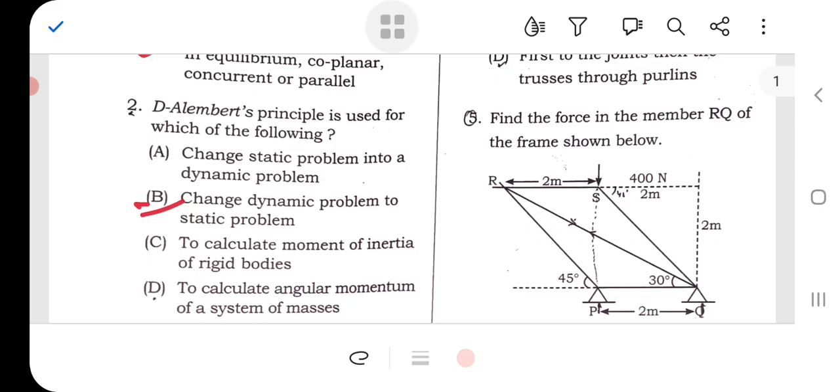Question number 2: D'Alembert's principle is used for which of the following? To change a dynamic problem into a static problem, using a free body diagram.

What is a free body diagram? It is a sketch of an isolated body that shows external forces on the body and reaction forces. Option C.

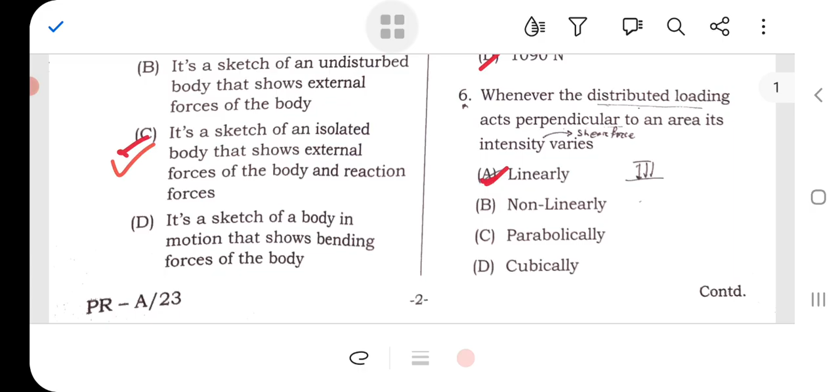Whenever distributed loading acts perpendicular to an area, its intensity varies linearly - this is called shear force. Then, calculation of moment of body due to loading involves a quantity called moment of inertia.

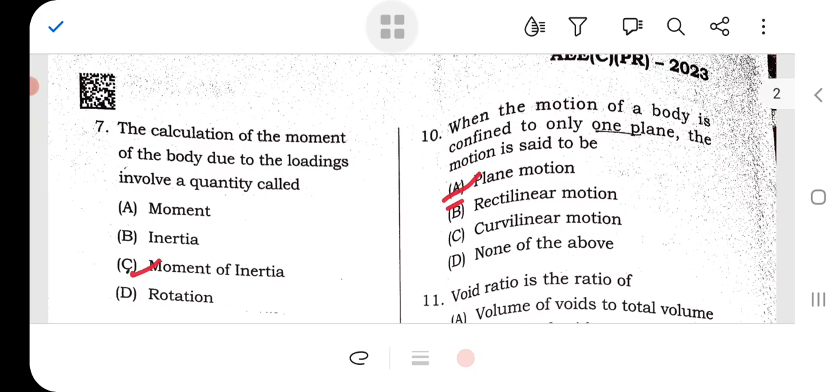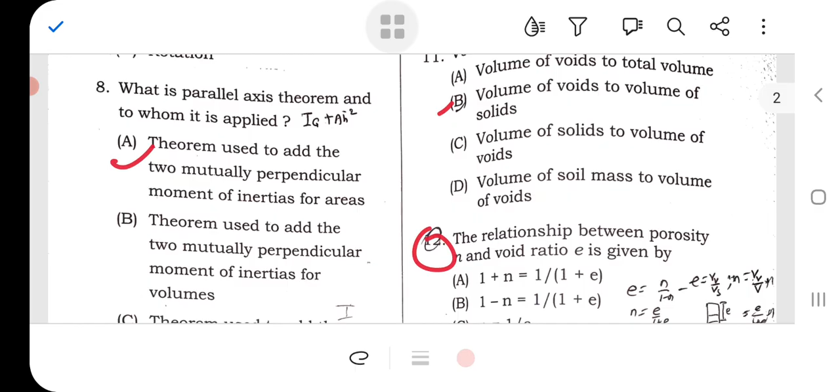What is the parallel axis theorem and where is it applied? This theorem is used to add the two mutually perpendicular moments of inertia for areas.

Option A: change in momentum of an object is equal to impulse. When the motion of the body is confined to only one plane, the motion is said to be plane motion. Void ratio is the ratio of volume of voids to volume of solids.

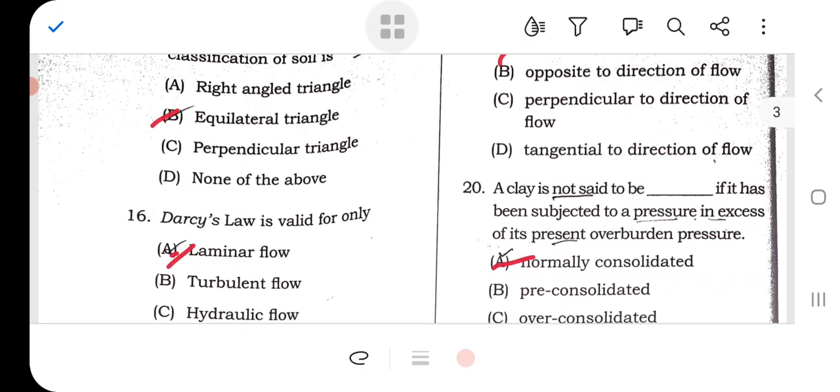The study of seepage of water through the soil is important for which of the following? Seepage study is important for purposes like drainage of soil, stability of slope, and ground water flow towards wells - for all these reasons we study seepage.

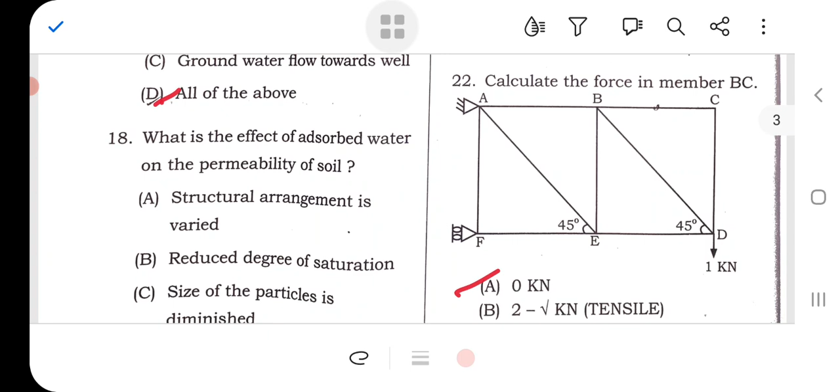What is the effect of adsorbed water on permeability? It reduces the pore size. Option D.

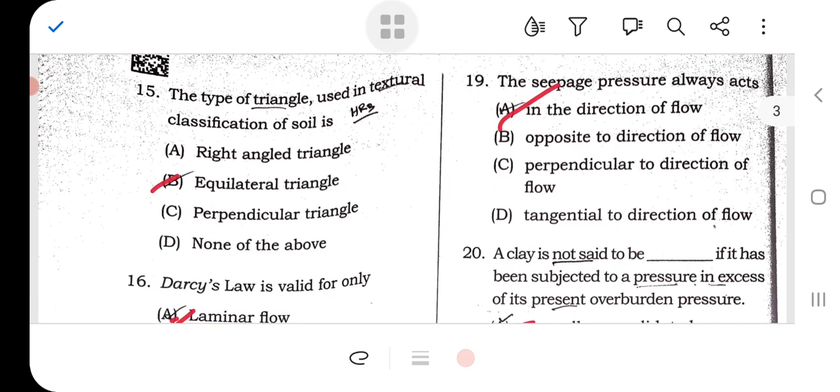The seepage pressure always acts in the direction of flow. A clay is not said to be [blank] if it has been subjected to pressure in excess of its present overburden pressure.

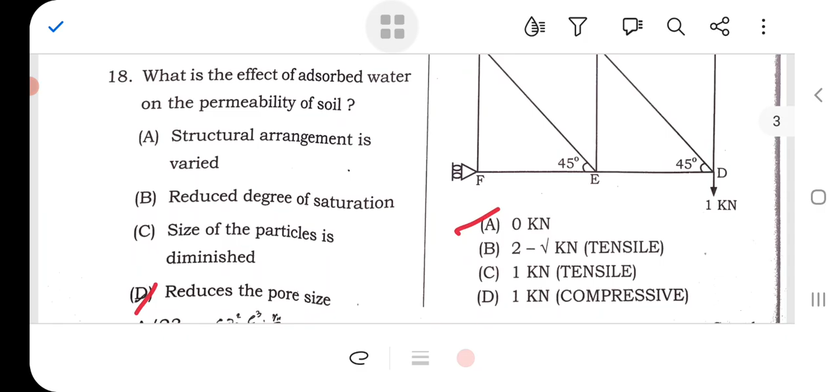Why is the base plate provided in short roof trusses? As provision for temperature related expansion and contraction.

Calculate the kinematic indeterminacy of the pin jointed plane frame. For a pin jointed plane frame, kinematic indeterminacy is 2j minus r.

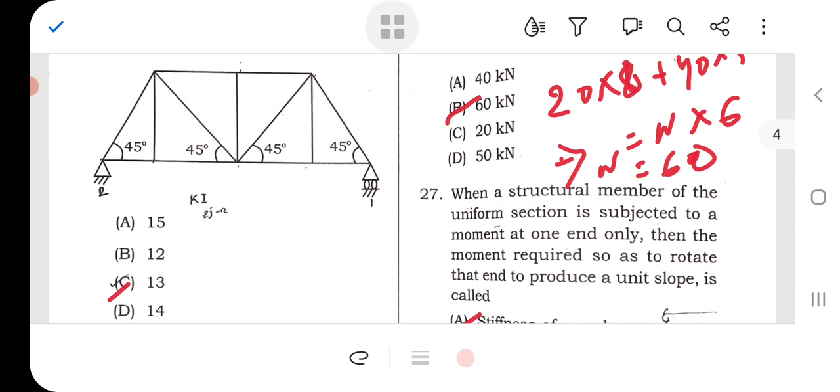Which of the following is placed false for deflection of a point near a fixed support? Displacement as well as slope is non-zero.

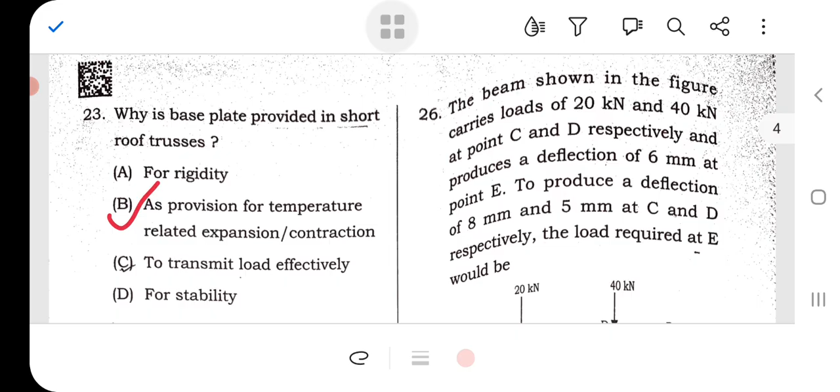The beam shown in figure carries a load of 20 kN and 40 kN at points C and D respectively, producing a deflection of 6 mm at point E, and deflections of 8 mm and 5 mm at C and D. Calculate accordingly - how much load produces how much deflection.

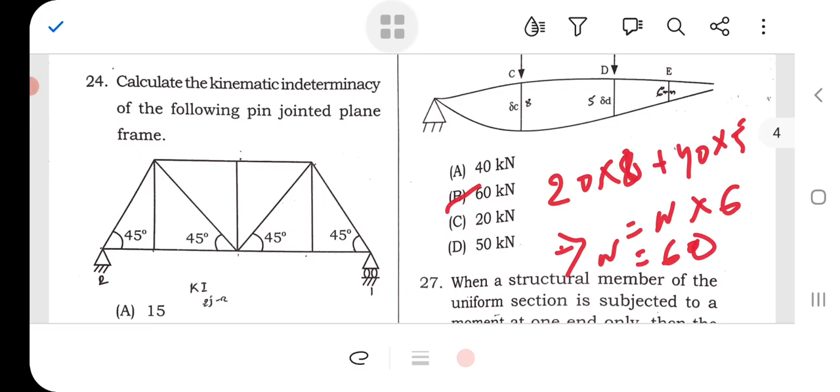When a structural member of uniform section is subjected to a moment at one end only, the moment required to rotate that end to produce a unit slope is called the stiffness of the member.

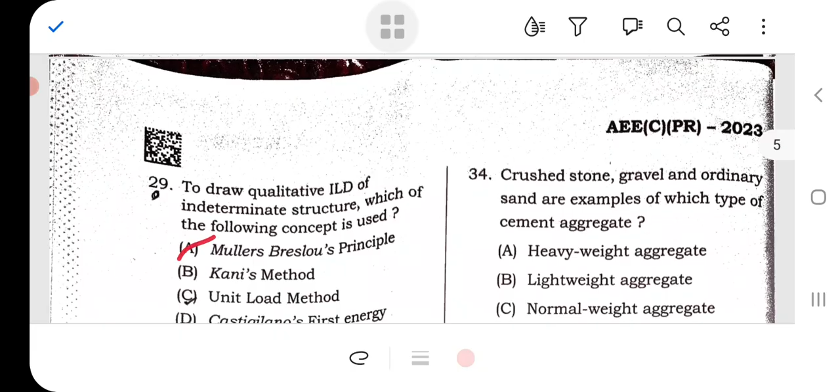To draw qualitative ILD diagram, which concept is based on the Muller-Breslau principle?

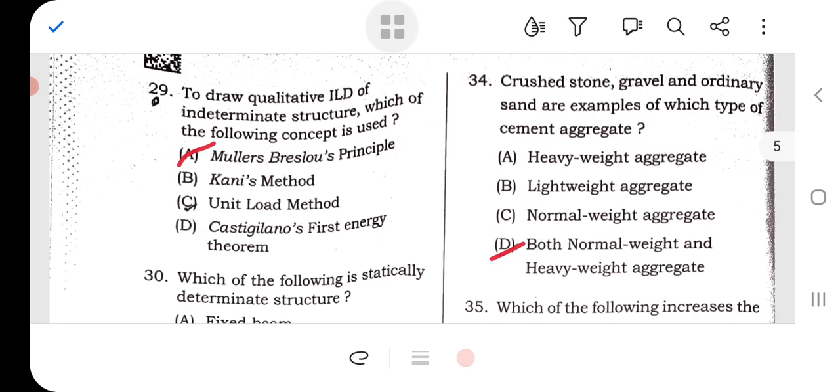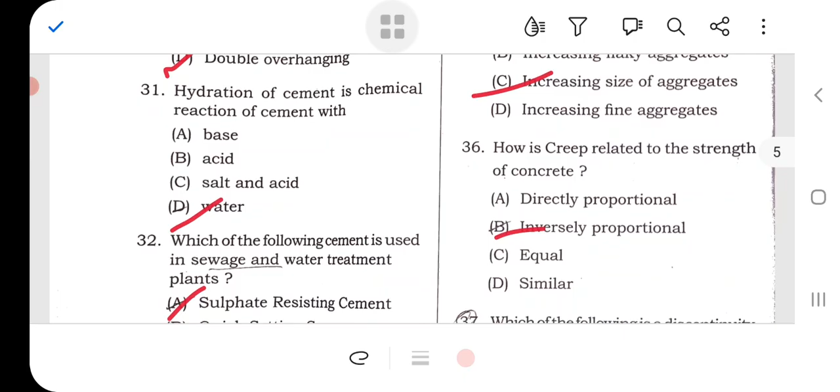Which of the following is statically determinate structure? Double overhanging beam is statically determinate structure. Hydration of cement is a chemical reaction with water.

Which of the following is used in sewage and water treatment plant? Sulfate resisting cement. How many layers of concrete are needed to fill a slump cone? 4 layers by height.

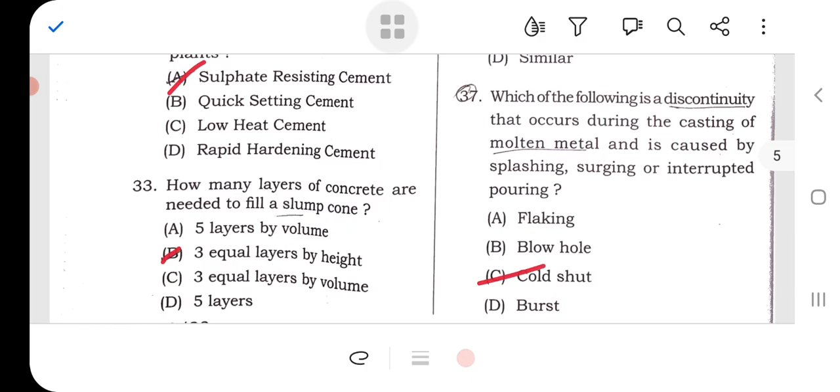Then discontinuity is which of the following? Crushed stone, gravel, ordinary stone, sand are examples of which type of rock? Both normal weight and heavy weight aggregate.

Which of the following increases the workability of concrete? Increase in size of aggregate increases the workability of concrete.

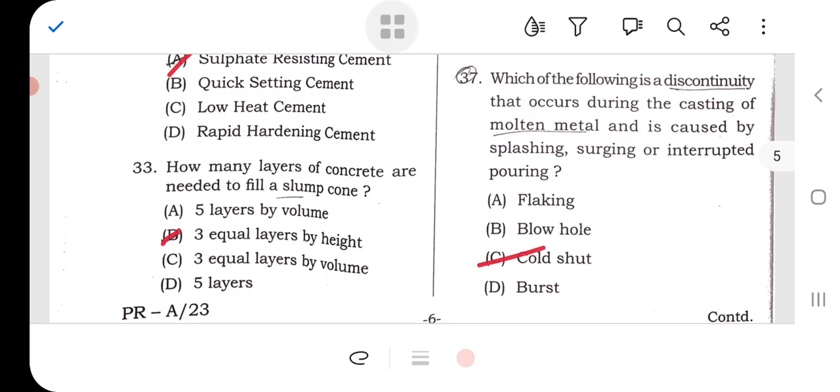How is creep related to strength of concrete? Inversely proportional, it is directly proportional to 1 by (1 plus theta). So theta represents creep, and theta with concrete strength is inversely proportional - as creep decreases, concrete strength increases.

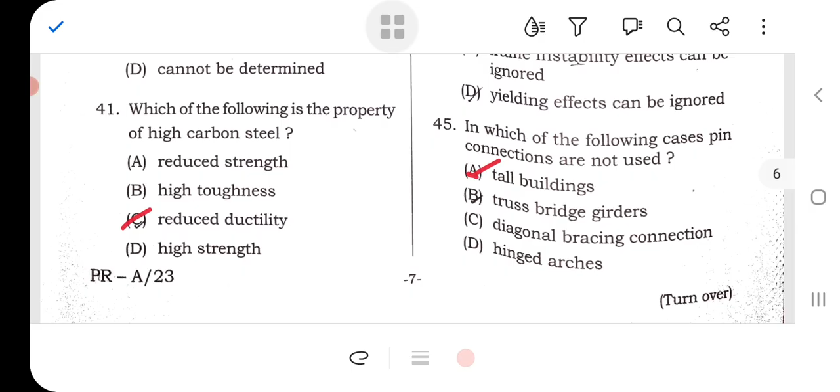Which of the following relation is correct? Design strength is equal to ultimate strength divided by partial factor of safety.

Which of the following is true about bracket connection? Option D: it has more rigidity than any other connection.

Which of the following is not an assumption of first order elastic analysis of rigid jointed frame? Member instability effect cannot be ignored.

In which of the following cases are pin connections not used? Pin connections are not used in tall buildings.

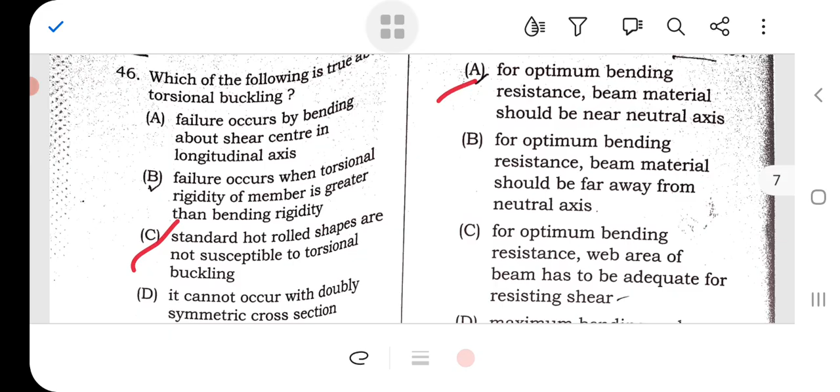Which of the following is true about torsional buckling? Standard hot rolled shapes are not susceptible to torsional buckling.

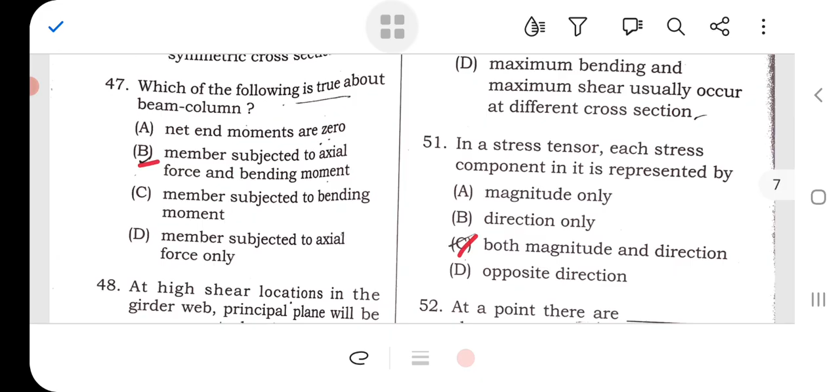Which of the following is true about beam-column? A member subjected to axial force and bending moment is true about beam column.

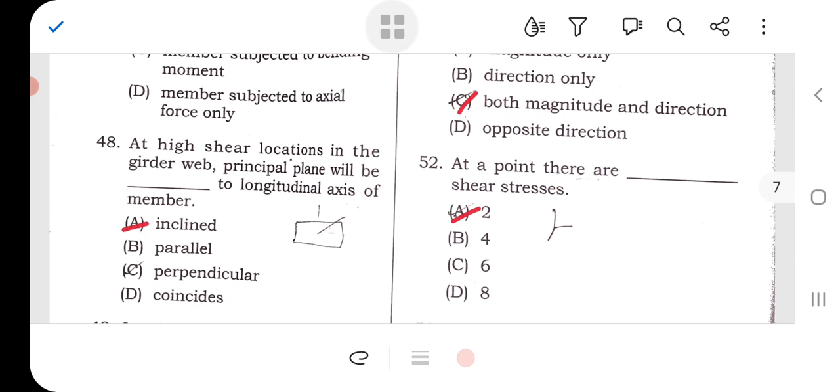At a higher shear location in the girder web, the principal plane will be inclined to the longitudinal axis or longitudinal member.

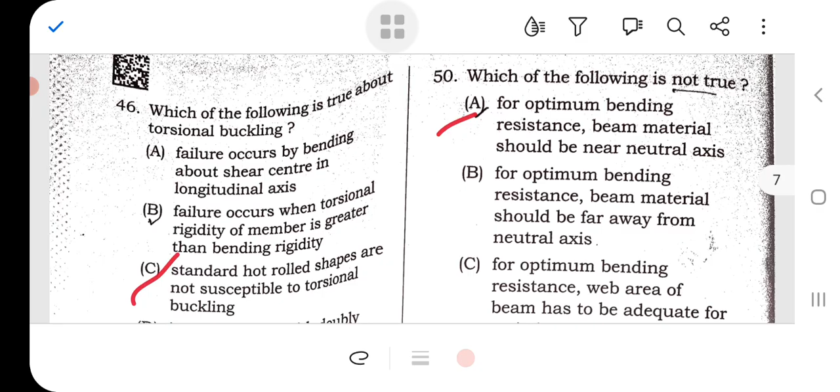Which of the following is not true? For optimum bending resistance, beam material should be nearer to the neutral axis - this statement is false.

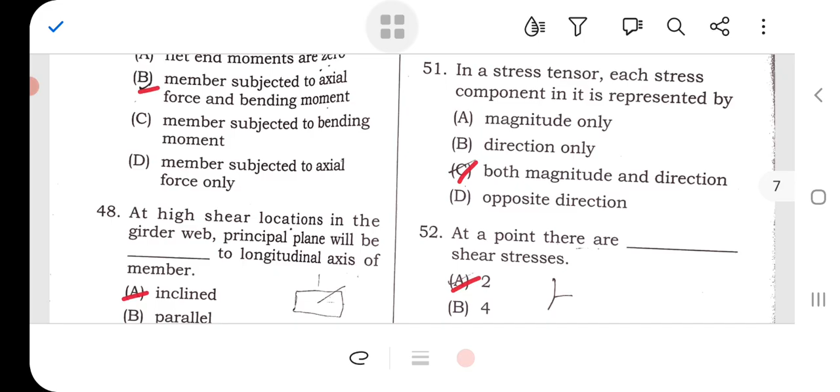In a stress tensor, each stress component is represented by both magnitude and direction. At a point, there are only two shear stresses.

Mohr's circle represents the state of stress at a point on an oblique plane.

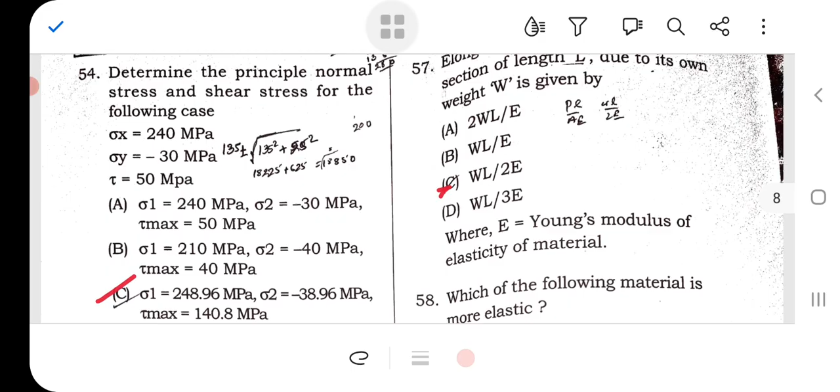Poisson's ratio is lateral strain divided by longitudinal strain.

Elongation of a bar of uniform cross section of length L due to its own weight W is WL by 2AE.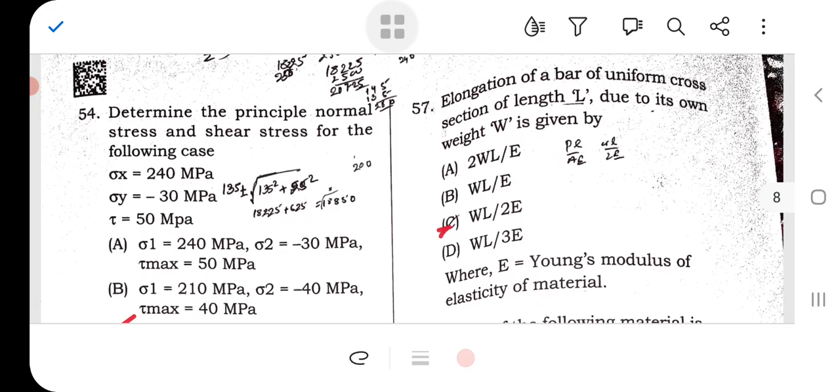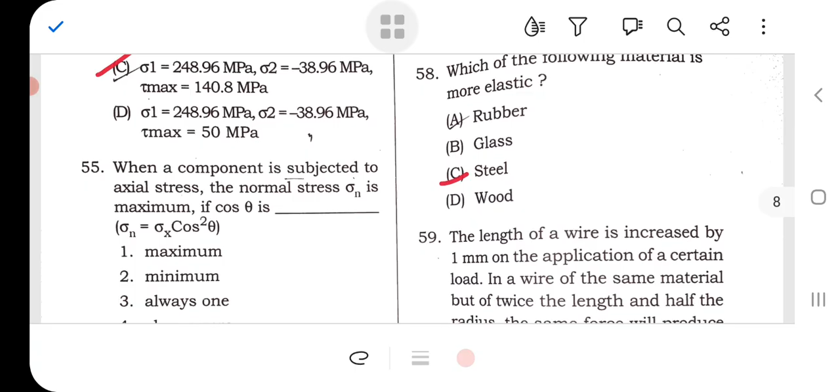Which of the following material is more elastic? Steel. Poisson's ratio of rubber is high, but considering steel's elongation behavior, we say steel is more elastic.

The length of a wire is increased by 1mm on the application of a certain load. In a wire of the same material but of twice the length and half the radius, the same force will produce an elongation of 0.5mm. We use the formula delta L equals PL by AE to work this out.

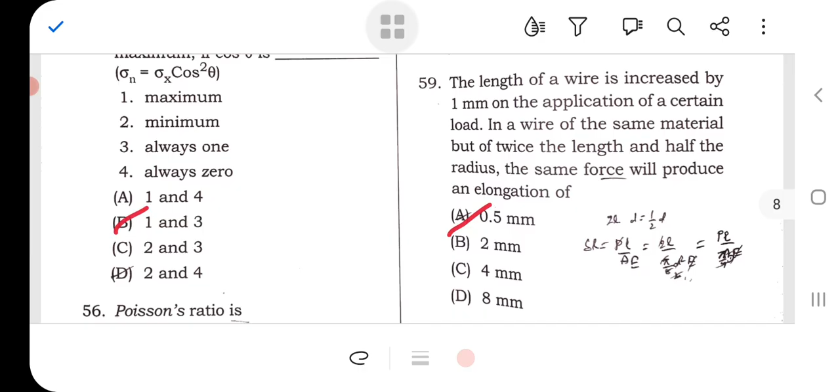When mild steel is subjected to tensile load, its fracture conforms to a cup and cone shape.

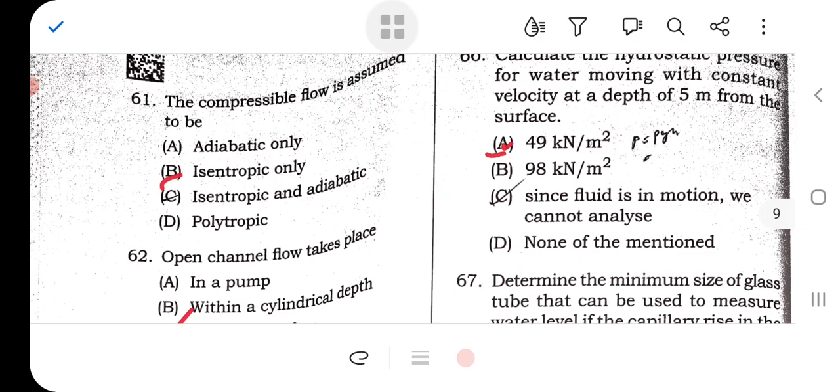The compressible flow is assumed to be isentropic only. Open channel flow takes place on a free surface. Froude number depends on flow velocity, external field, and characteristic length.

The pressure at any given point of non-moving fluid is called the hydrostatic pressure.

The hydraulic press has a ram of 30cm diameter and a plunger of 2cm diameter. It is used for lifting a weight of 35 kN. Find the force required in the plunger. This is solved using Pascal's law; using Pascal's law we calculate and get the answer as 155.5.

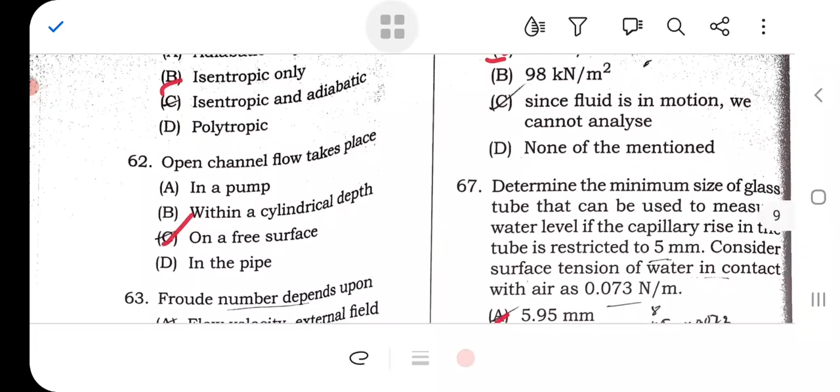Calculate the hydrostatic pressure for water moving with constant velocity at a depth of 5 meters from the surface. Answer: 49 kN per meter square, using the formula p equals rho g h.

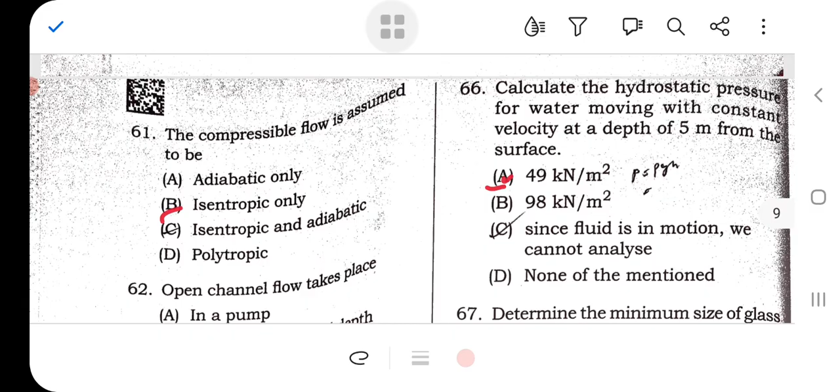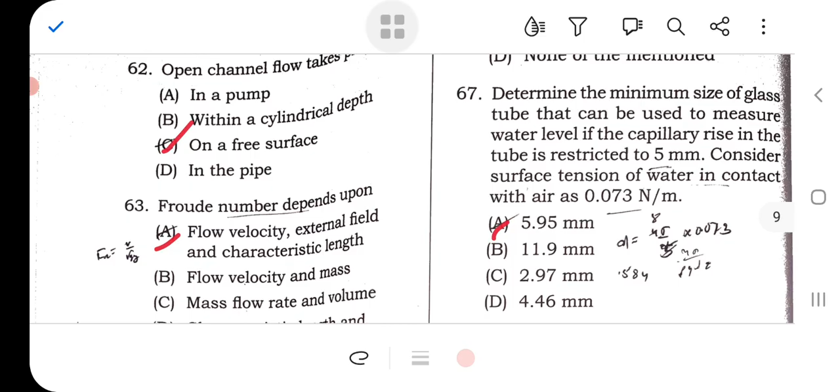Determine the minimum size of glass tube that can be used to measure water level, with capillary rise in a tube restricted to 5 mm. Consider the surface tension of water as 0.073 Newton per meter. Using the formula 4 sigma by d, the answer comes out to 5.95.

For a liquid, capillary rise will decrease or fall with rise in temperature. As temperature rises, capillary rise decreases.

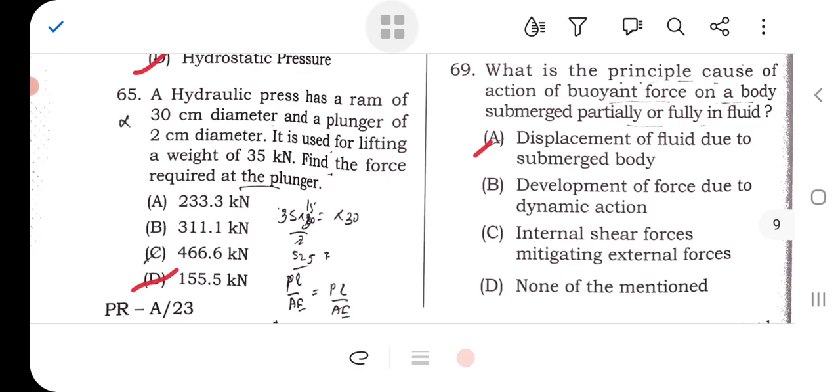What is the principal cause of buoyant force? It is the displacement of fluid due to the submerged body.

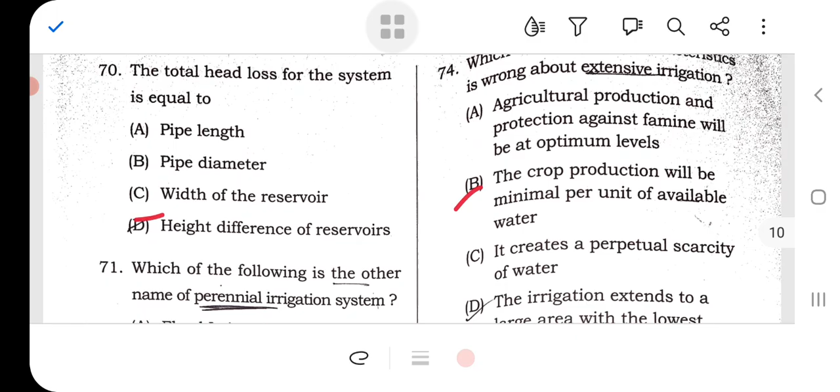Total length: the total head loss for a system is equal to the height difference of the reservoir.

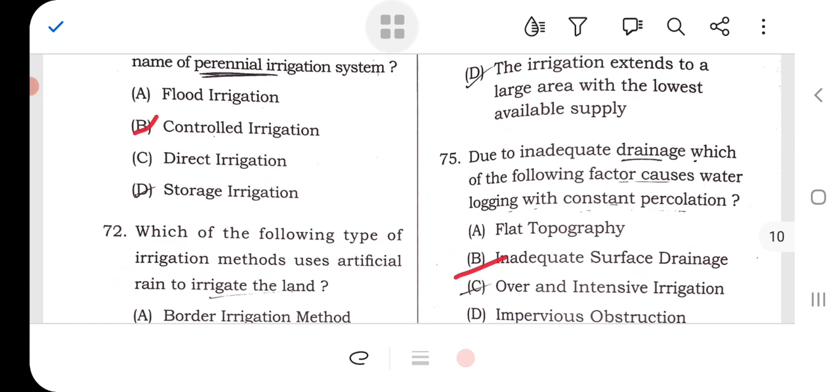Which of the following canal acts as an irrigation canal as well as a feeder canal? The answer is the carrier canal.

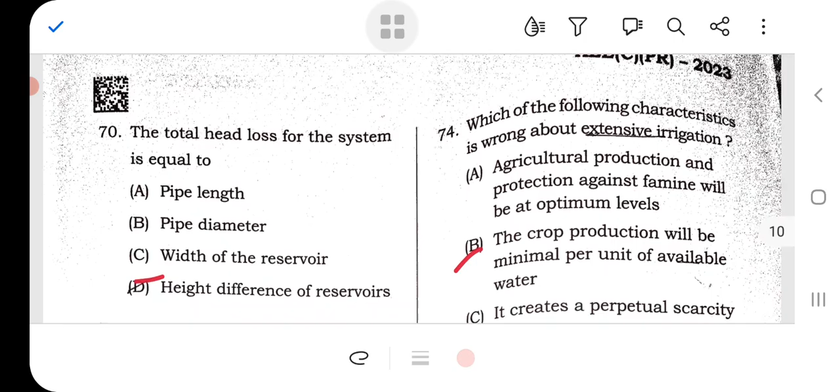Which of the following characteristics is wrong about extensive irrigation? The wrong statement is that crop production will be minimal per unit of available water, since extensive irrigation uses less water for more cultivated area.

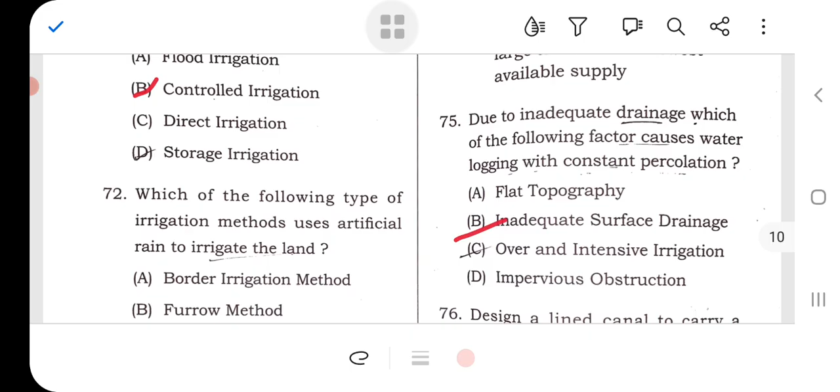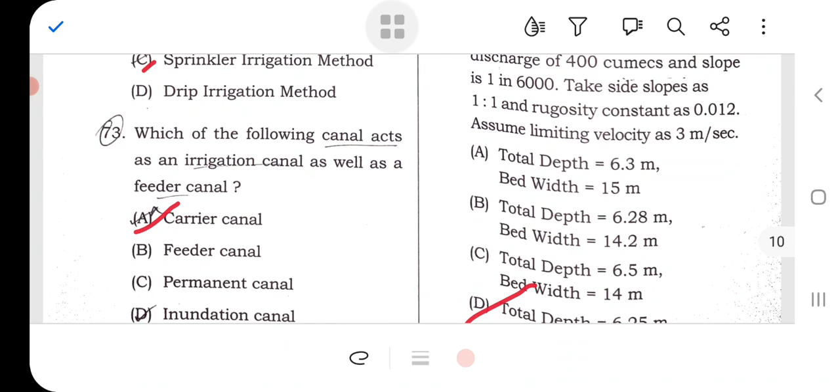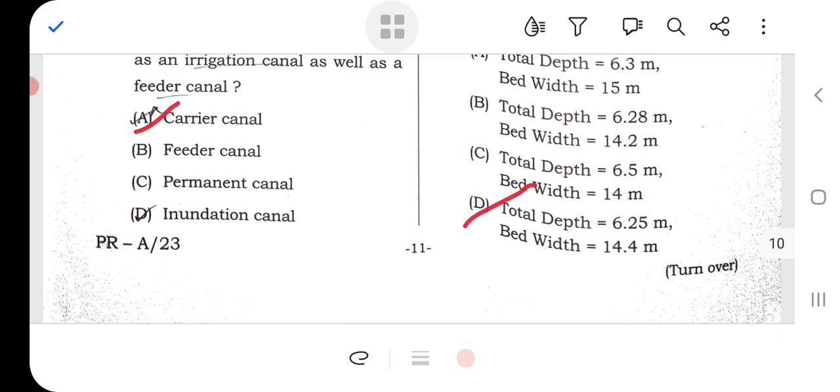In a lined canal carrying a discharge of 400 cubic meters per second, with slope 1 in 6000, side slope 1:1, and rugosity constant 0.012, applying Manning's rule gives a total depth of 6.25 meters and bed width of 14.4 meters. This calculation is complex, so let's skip this question.

What type of major danger can canal lining eliminate? The answer is seepage loss.

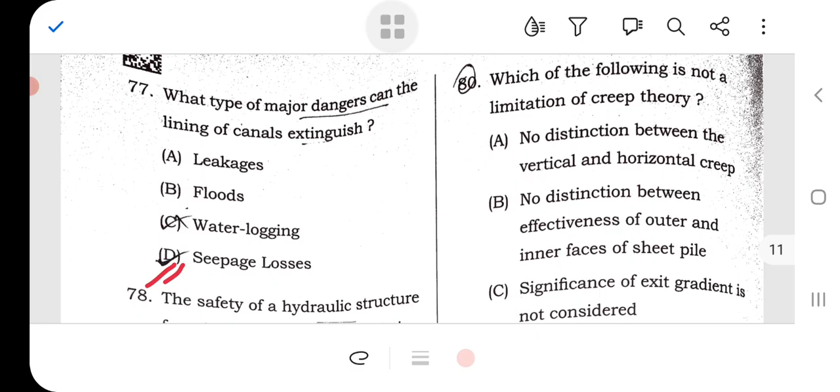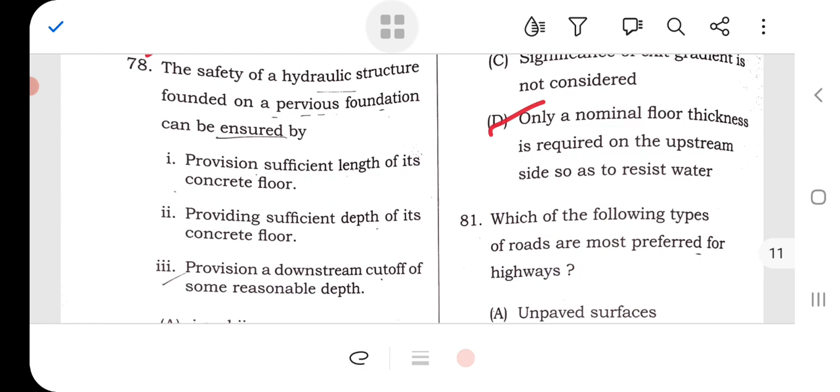The safety of a hydraulic structure founded on a pervious foundation can be ensured by provision of sufficient length of concrete floor, providing sufficient depth of the concrete floor, and provision of downstream cutoff of some reasonable depth. The answer is all three.

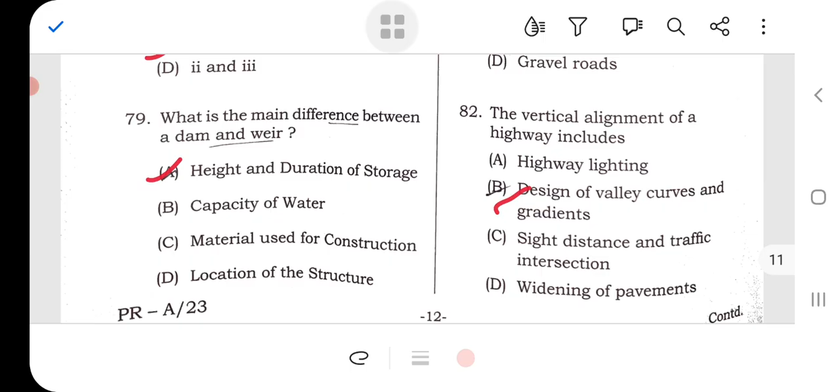What is the main difference between a dam and a weir? The answer is height and duration of storage.

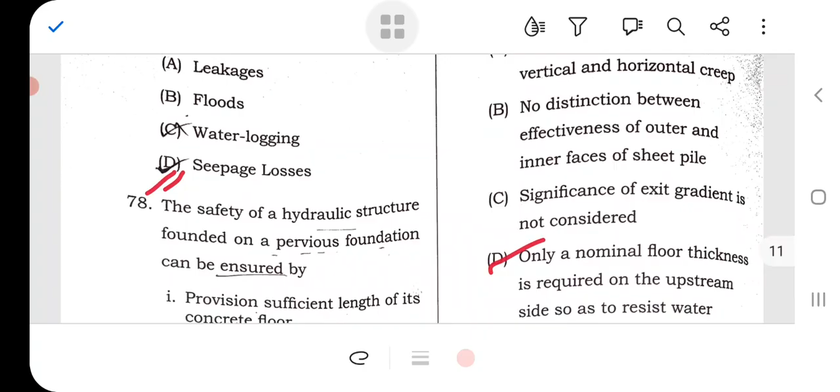Which of the following is not a limitation of creep theory? The answer is that only nominal floor thickness is required on the upstream side so as to resist the water.

Which type of road is most preferred in a highway? Bituminous road. The vertical alignment of highway includes design of valley curves and gradients.

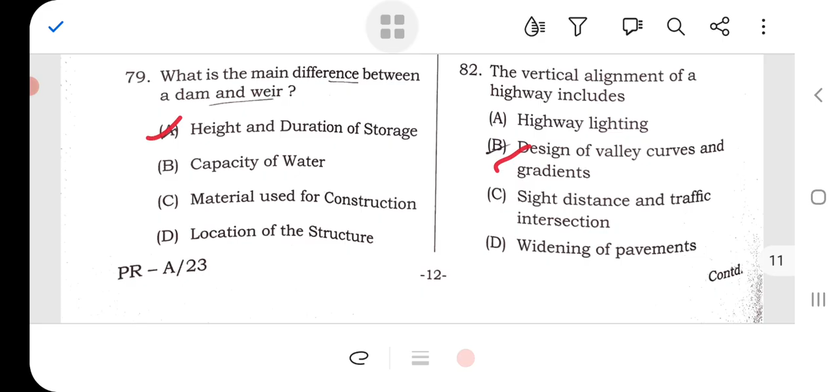The extra width of pavement is provided on horizontal curves. A transition curve is introduced between the straight alignment and the circular curve.

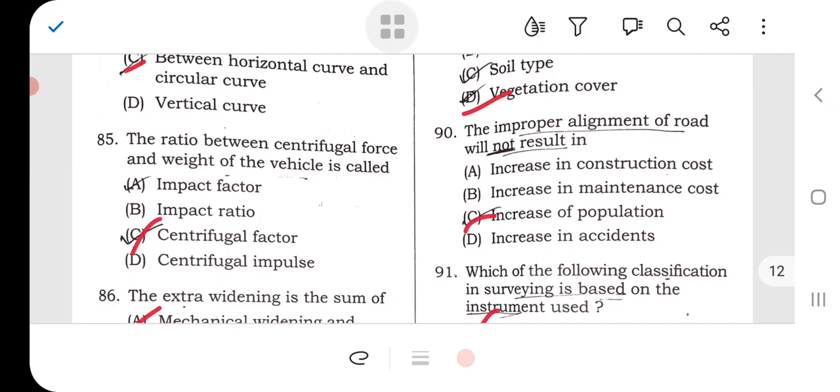Then the ratio between centrifugal force and weight of the vehicle is called the centrifugal factor or centrifugal ratio.

The extra widening is the sum of mechanical widening and psychological widening.

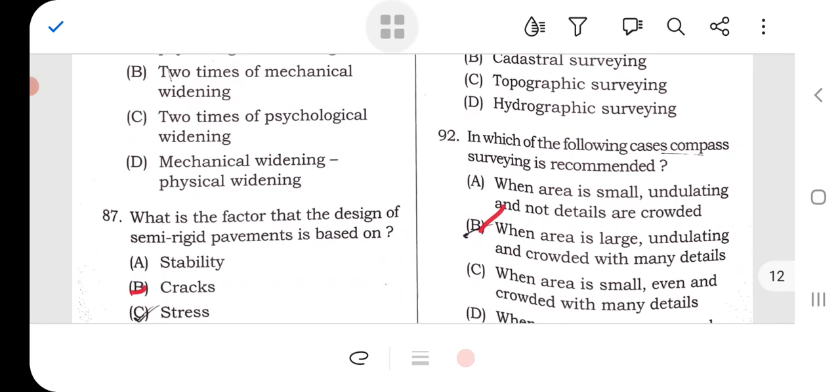What is the factor that designs semi-rigid pavement based on? The answer is crack - semi-rigid pavement is designed based on crack control.

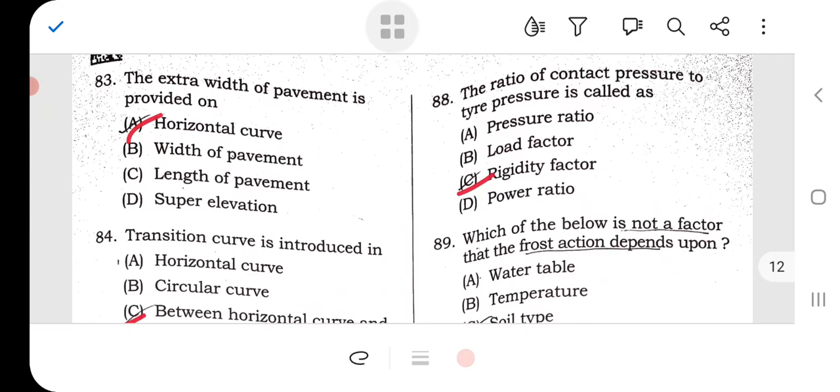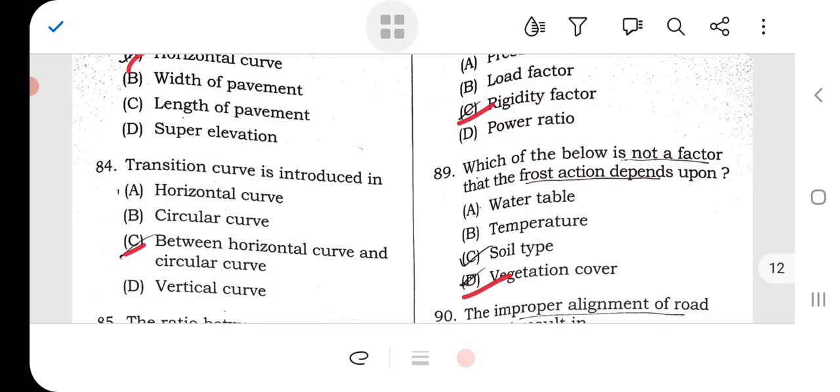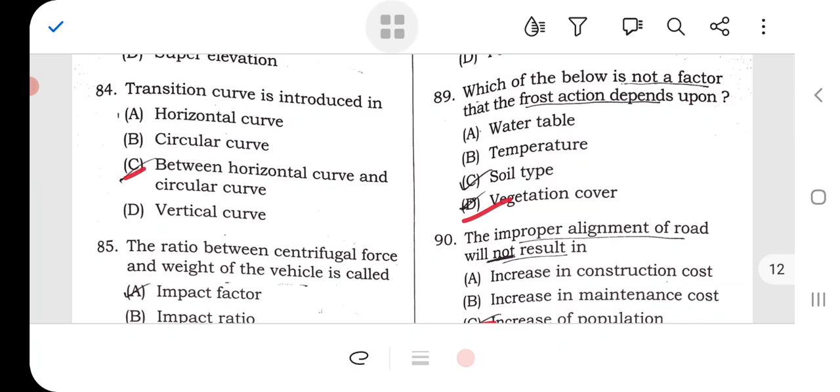Which of the below is not a factor that frost action depends upon? The answer is vegetation cover. The improper alignment of a road will not result in an increase of population.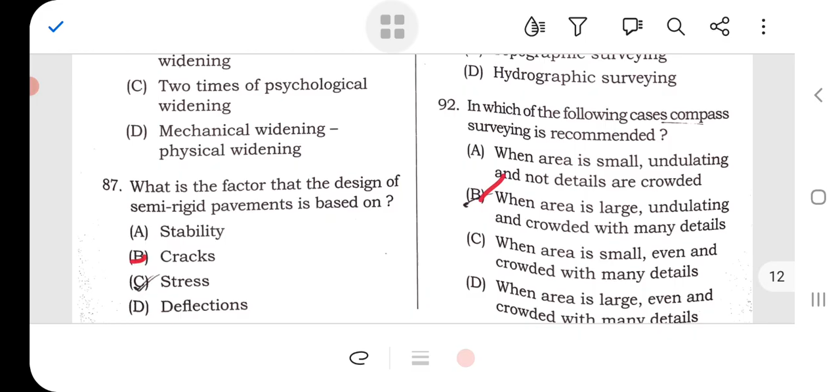Which of the following classifications in surveying is based on instrument? Traverse surveying. In which of the following cases is compass surveying recommended? When the area is large, undulating, and crowded with many details.

Which of the following cannot be done with the help of theodolite surveying? Measuring horizontal distances. Which of the following is the principle of surveying that works from whole to part?

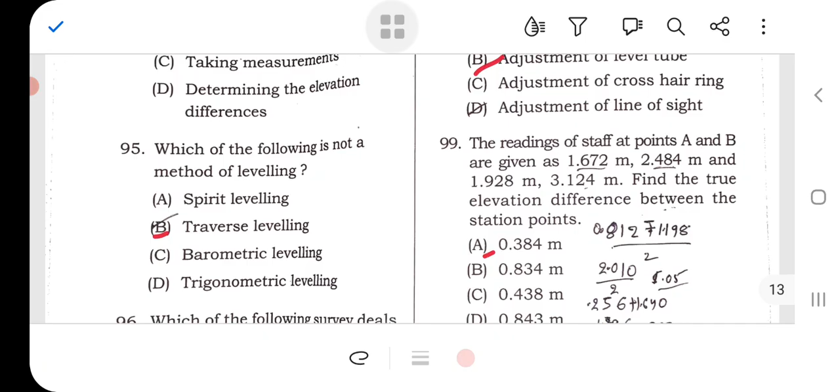Which of the following methods is not a method of leveling? Traverse leveling. Which of the following surveys deals with water bodies? Hydrographic surveying.

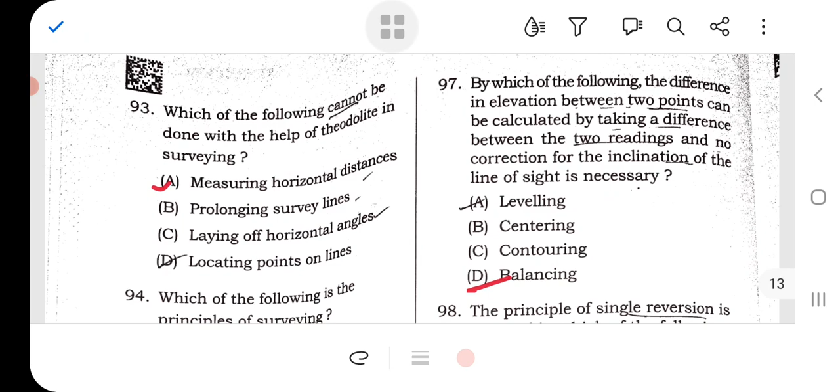Which of the following is the difference in elevation between two points that can be calculated by taking the difference between two readings with no correction? That is balancing. The principle of single reversion is involved in which of the following processes?

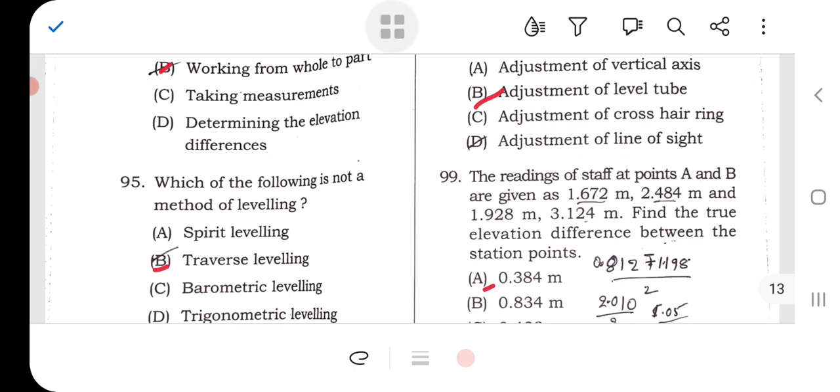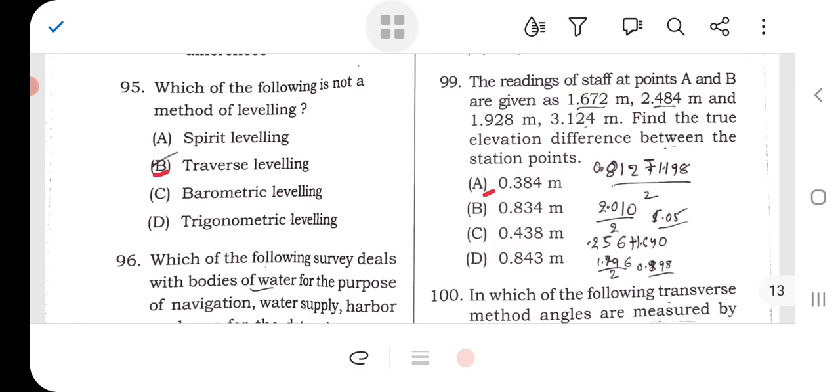The reading of staff at points A and B are given as 1.672 and 2.484, and 1.928 and 3.124. To find the true elevation difference, we calculate the true elevation difference and divide by 2, giving an answer of 0.384.

In which of the following traverse methods are angles measured by theodolite through direct observation of angles? Let's skip this question. Thank you.